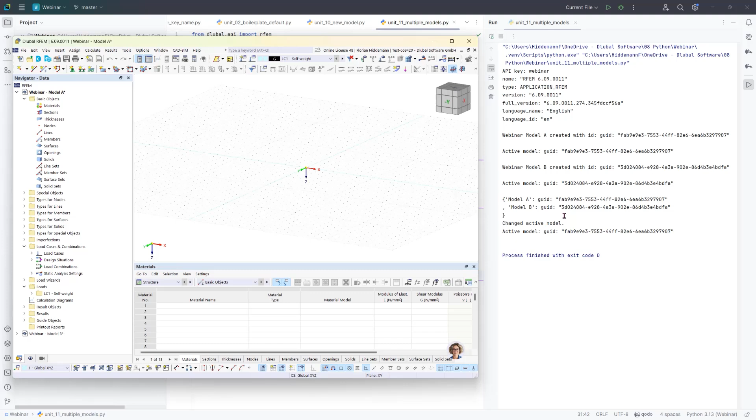And on the right side you see it - here's the first GUID of model A, this is the active one. The second one, model B, is created with this ID, and RFEM switches the active model to this one. This is stored in our dictionary, and I can change back to model A with just a simple call.

If you are in an active model, every other API call uses this model for manipulation. So you can have one connection working with several models, switching back and forth and getting information at runtime about which model you are actually in and where you want to go.

Another important use case to work with models is if you already have existing models as an RFEM file. In this example, I will open a model from an existing RFEM file. This is stored and set up here as an absolute path, in a raw string. We make our connection and say, open the model from this path.

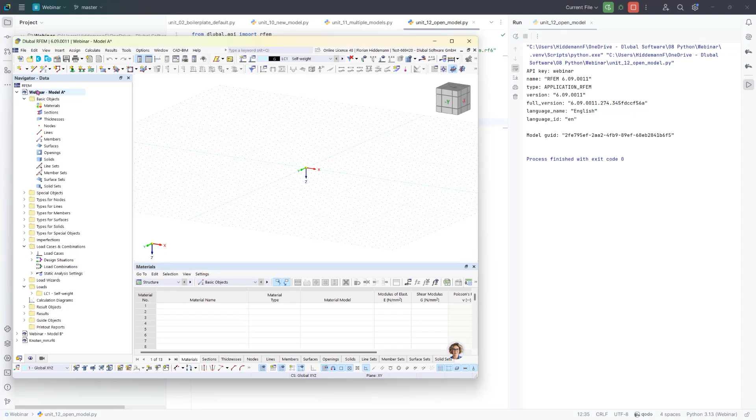What we can show just here - I prepared a simple example model. So we can see it opened and get his model ID back.

This model here is the one which is prepared, and I set it up with other units here as a model setting, where you can see it's not a freshly created one. Important to say, we are working with SI units here for all input values and for all output values, which we see later on in the results.

Okay, this is now the installation and getting started part, working with multiple models. Now we change to the principle of operation - how to actually work with RFEM objects. We will look at the mapping of the structure navigator and the API structure, and how to deal with the properties and make new objects and update them and so on.

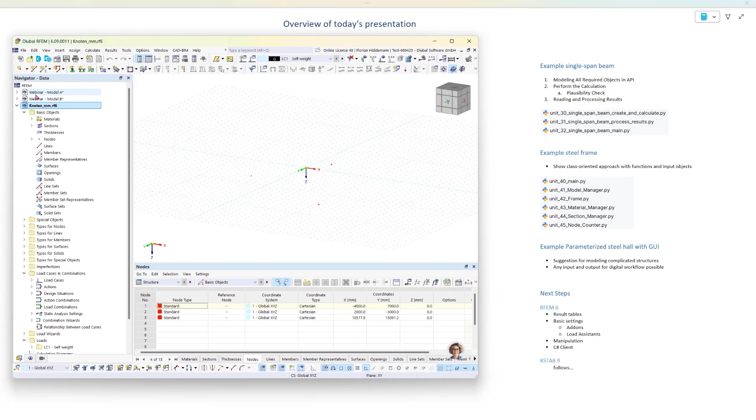If you are familiar with the RFEM structure itself, you will see that our API is trying to get as close as possible to the structure in the navigator. You have here some basic objects - structure core, structure advanced, we call it in the API, types for nodes, types for lines, and so on, nodal supports. Everything you can see here and navigate through, we are trying to replicate as far as possible with the structure of the API itself.

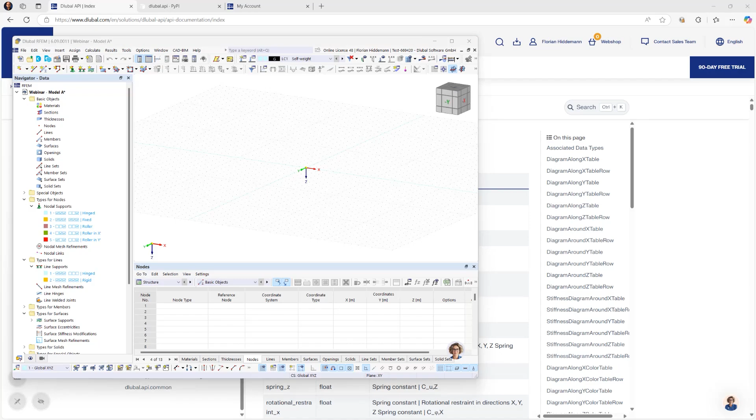So you also have structure core, which is lines, nodes, members. You have the loads, the loadings, and you have types for nodes, nodal support. This is really corresponding to the structure you can see in the main program, just to give you a better insight where to look for some objects. So how is it working now? We start by creating a simple node.

When we made a new model, this is called create node. First, I define my node with the wished properties. In principle, you can say we have two steps every time, or two separate parts.

One is I'm working with model objects from the API. You can see here, this is a node using the structure core from the RFEM package. This object is used to define what I wish as a user to model in RFEM. And this node object is given as a gRPC message to my actual API call.

The API call, we don't have so many API calls like in our first generation. You can see the API call itself, it's very lean. We have calls to calculate, to create things, to delete things, to get things, save things. There are some specialties like a plausibility check, working with the models I showed you. But this is really it.

There are maybe 30 or 40 API calls in the future, and a lot of objects to define and transfer. And all properties, all model objects are defined by these model objects API. So this is important to understand: I define my desired object and send it via this call to RFEM and let RFEM model it.

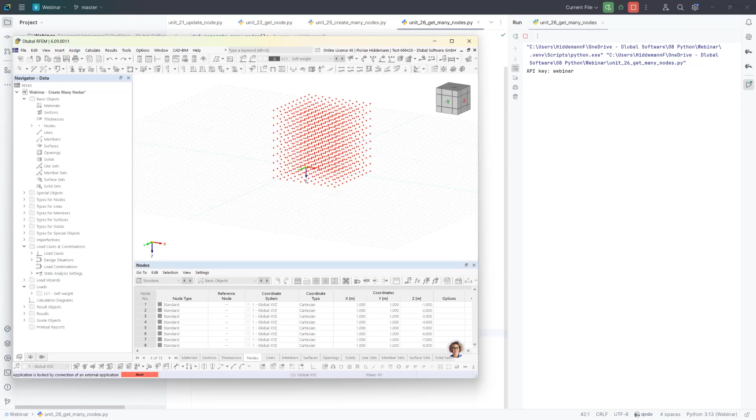Just open RFEM, create these nodes again, and what's happening right now is, we hold here, print and hold, and say, okay, show me this node list you returned. This also is a self-defined class in our package. It's not a dictionary, it's a special object which is representing our object ID list. And this object has all the node IDs and says, okay, this is an object of type node.

So this is a way to get back which ID is defined via this call for many nodes. It answers with, okay, I created 1,000 nodes, and here's what I created. And the last one has number 1,000, and it was a node. Right. So if I want to manipulate these nodes later on, first I need to create an own list where I store dummy objects which contain these node numbers. And to make an iterable object from this returned node list, I have to add object ID after it. Now I can iterate over it in Python.

And we will make a new real list, which is called dummy nodes. And for each item in this object ID list here, which is iterable, I will append a new object. It's a new node containing exactly this number we see from this output. So after that, we have a list with dummy nodes. And let's have a look at this.

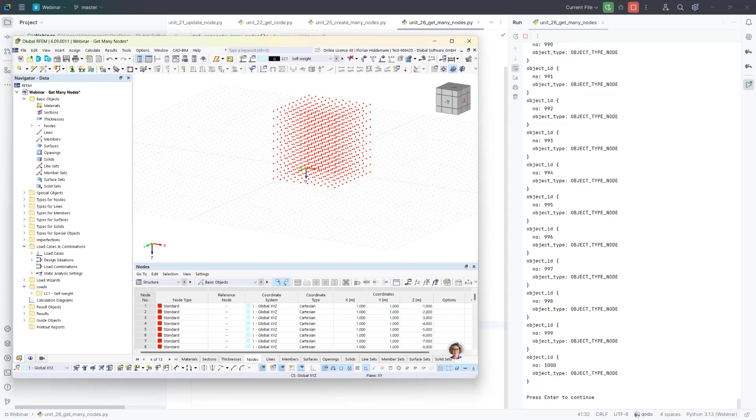Oh, isn't it working? Yes, no. Okay, now it's doing the second and third one.

So we printed the list with dummy nodes, and if you print a node and the only information it has is its number, it prints its number. So we have stupid nodes which have their number, and with this list I can work later on to manipulate them. But this is the first example, a workaround how to get numberings from a node definition at the moment. We are working on improvements about it.

So if you have now the IDs, then you can ask RFEM, okay, give me the objects for nodes with this ID. And this is the last step here we just saw. This is corresponding to what you see if you get a single node information. We are doing the same like here with an object list, with a list of node IDs. And we can see these are the informations for each node we have created with the many nodes function.

So now we can also update a lot of objects at the same time. Like last time, it's an extension of the shown example. We have the returned object list, and I just made a helper function which is handling these object IDs and making the dummy list for me. It's returning the dummy objects. I show you in the last step here as an own block, and they are stored here.

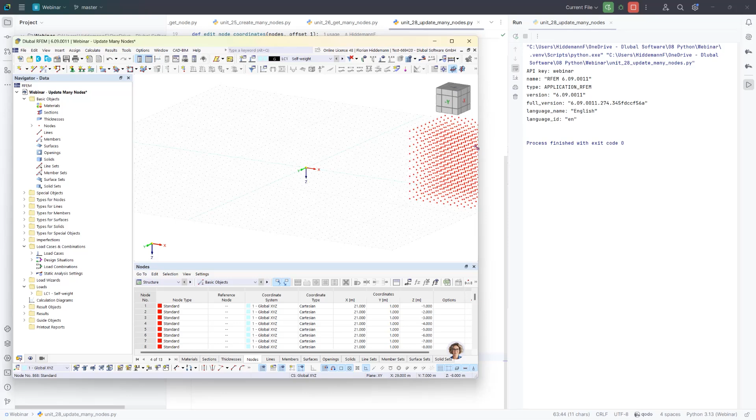So now let's finally dive into the small real-life example of a single span beam. We will use the principles we got to know in the first 2 chapters, playing around with nodes, and now go for other objects as well to model a single span beam. If you look closer here, we are doing exactly the same like with the nodes. We will slightly restructure it to make this work within our own create and calculate function. The single span example is split into create and calculate, processing of results, and a main script which is calling both of them by importing these unit examples.

Let's have a look into create and calculate. We will again define all model objects with one creational call, create object list, you know that in the meantime. And the specialty is that we are defining all model objects in one list, not only the nodes. So you can see here we have the same small import with Dlubal API RFEM, and we have the nodes, the line, material, section, and member. Everything in this structure you are already familiar with.

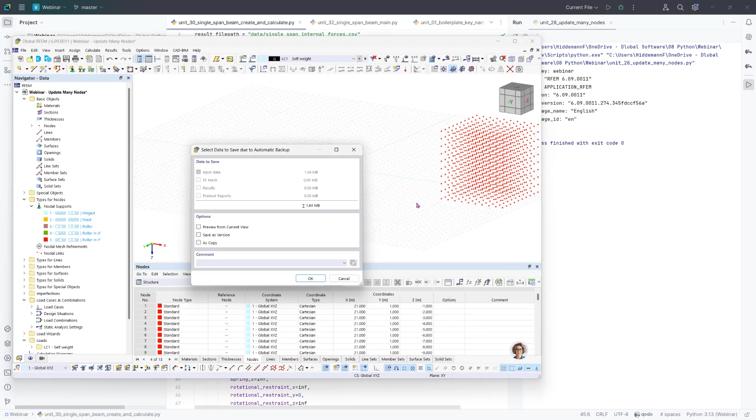If you want to define material and section, maybe you know it from applications in the past, just go into these RFEM settings, for example, and try out what's happening if you look for a special string. What's happening here in the background is if you put a string as a name for a material or a cross-section, RFEM is looking up the first option it finds and uses it later in the program, so you can check it on the fly, what is what.

So in this way, we also define the loadings, design situation, static analysis setting, load case, member loads. Remember, it's defined in SI units. And why is it important to define everything from scratch? With this call here, I delete all existing objects in the RFEM model. And you know it by default, if we create a new model, here are some objects and load cases which come as default. And with the delete all objects call, every one of these objects is deleted. So you have to make everything from scratch.

And as well as here, in the examples on our website, you can see different types, not only the nodes I showed before. So you can have a look later on, or every one of these unit lessons here will be provided after the webinar for you. So once you defined the object and created it, we will perform something new. We will make a plausibility check.

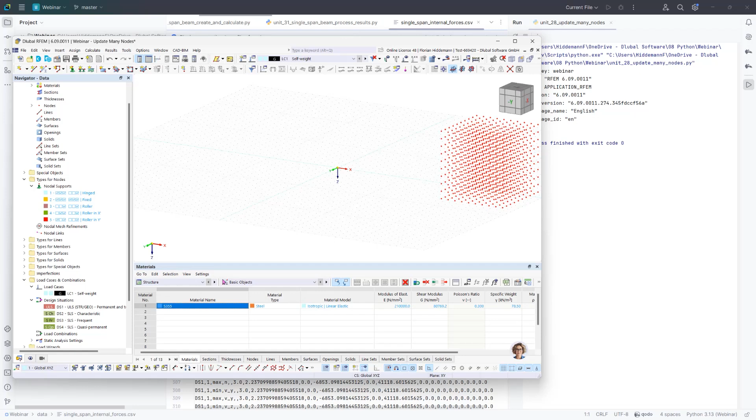And the result format you will get is more or less directly oriented. This is the CSV we will get. It represents the table you can also view in RFEM. So the whole structure of getting results is based on the structure we get in the results table too.

But let's see what happens in the program if we start it. So what happens here in the background, you can see it on the right side as well. The plausibility check was successful, true, so the calculation just started. You can see it here, bottom left.

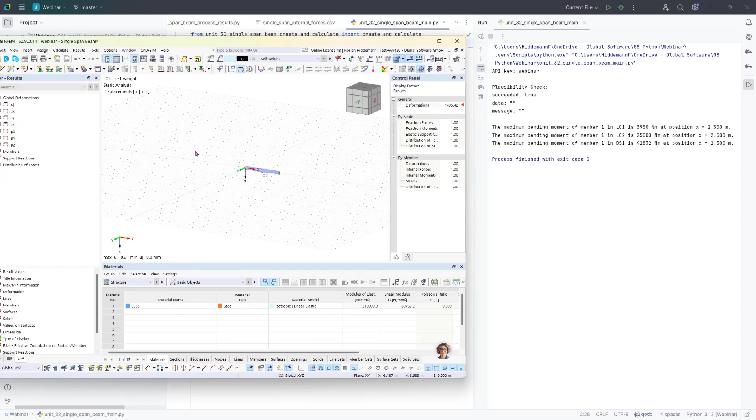And now it is getting the results, processing them, and is printing out what we defined here in our little process script, just to give you an idea how this is working. And let's check what we found out. If I go to the server here and activate the results, we looked for the maximum bending moment about the y-axis.

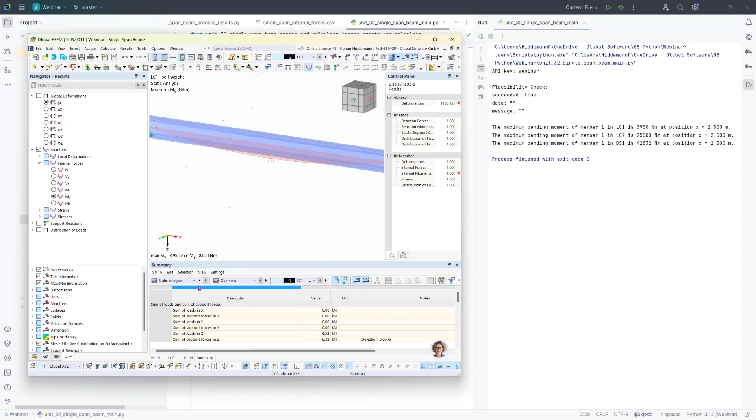So it's 3.95 here in SI units, Newton meters, at the position X, 2.5 meters. The whole beam here is 5 meters, so this is plausible. And you can see if we have the results table for static analysis.

And go, for example, in the results by member, this type of presenting the results and the internal forces here corresponds with the logic the CSV file is built up in the background. So if you get the results, it's more or less oriented to the logic you see in the result tables. Again, we try to make it as comparable as possible to the RFEM structure, like with the navigator for input objects.

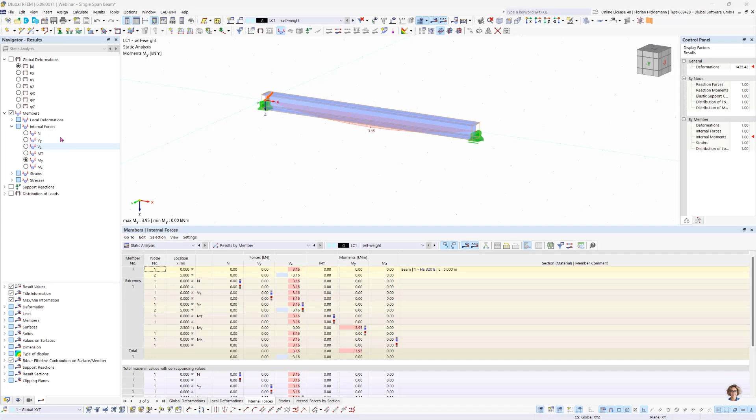So what do we have as a maximum? 42.83, and we found the same value in the CSV files. So that worked quite well. And now you got an idea how to work with a full case of a small model.

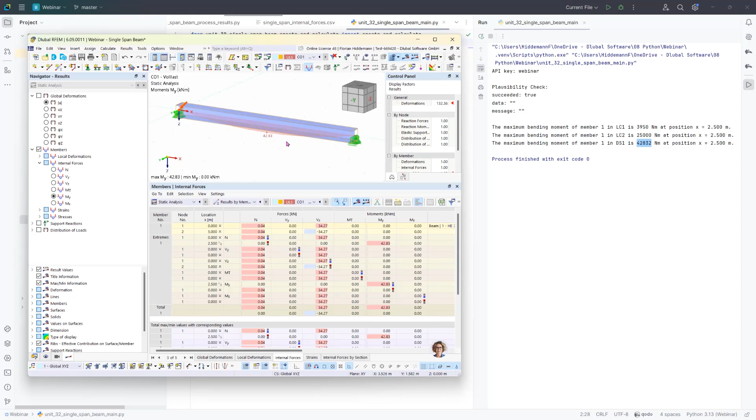Calculate all is one of the API requests which costs Dlubal credits. If you perform this action, you will see a new API request in your extranet and see we used 1 credit for 1 solver run. So have this in mind when you need to check which call was requested for some credits.

So in the final minutes, I will switch to another 2 examples. Just a quick glance on the steel frame here, which showcases how this could look in a more class-oriented implementation. Because what's important to say, you don't necessarily have to work with the with statement and RFEM application. Of course, it is also possible to write your own class, for example, and open the connection within this call.

But then you have to handle closing the connection as well, to ensure that RFEM opens and closes. In the with statement, it is managed by Python automatically, because the implementation of our application method is handling this together with the with statement. But if there is a need to define your own classes for testing or for productive use, feel free.

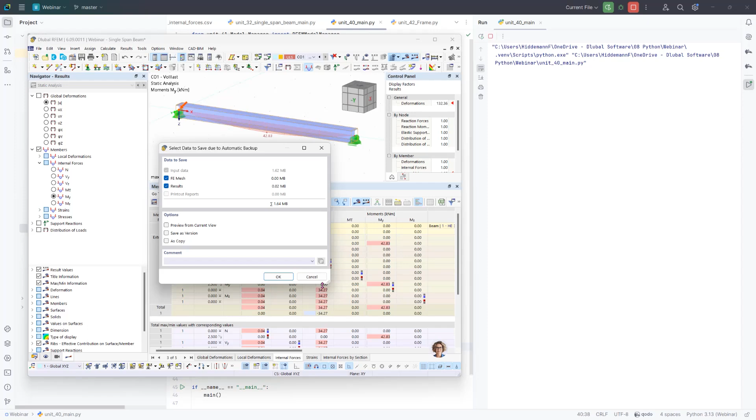And you can use, for example, your own model manager, which is opening and closing connections with your own set of code. It's quite another style here. You can also make your own classes for frames and so on, for calculation of nodes, for members. Just to say it's not necessary to work with the with statement. So let's see how this is going. Of course, the connection then opens and closes as well.

And here in this example, I used a class for a frame to model two different frames, which build on my own class I wrote, with separate properties. And you can be very creative, defining your own classes, your own model definitions, put some complicated logic inside. And what's really nice about it, here in the frames, there is no single API call included. Everything will be handled in the model manager by transferring an object list to actually build these objects.

And in this example, because I don't like to repeat myself every time making plausibility checks, I just built in a method which automatically performs a plausibility check. So you can automate your workflow like you wish, so that it tries to calculate, and if the plausibility check is not successful because the model was not supported, we see it here, we just built the frames but with no support, then it doesn't calculate, everything is handled well, and the connection is closed. So just to get an idea what is possible with that.

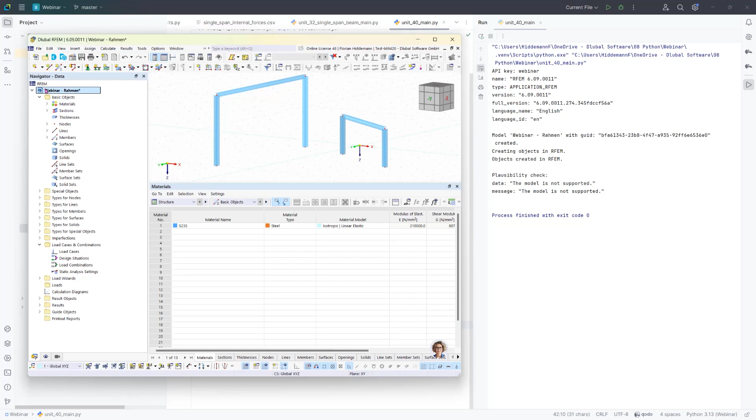And finally, we will have a look at the steel frame, which my colleague Robert Milrat provided me, thanks to him. So let's close this model and switch to this project. We prepared this in a way that we will see our own graphical user interface. So let's see. Here we see this graphical user interface, and I will open RFEM in the background.

So just to give an idea, you can do whatever you want with input values. You can do whatever you want with the results you get from our API. So just as an interpretation of what is possible, you can program yourself a UI, web application workflow, a database workflow, whatever you need.

And if we create this parameterized steel hall here in the background, you will see there is a time-consuming process opening a project file. This is what you can see here. This is at the moment what is taking some time. Once the model is opened and the data is loaded, it will be very fast to model all these entities we defined in the program.

So you will see the performance speed advantage also on this model, but don't get confused about reading data here. This is not the API call which is taking time right now. Maybe we will have a look into this further, how we can improve the preparation of this model. But preparing, reading the data takes some time.

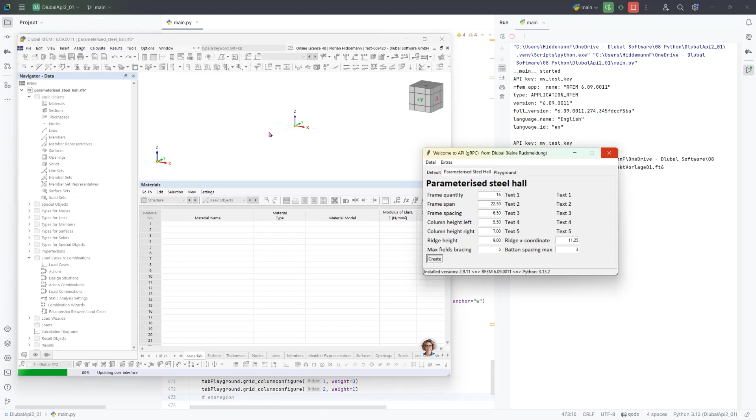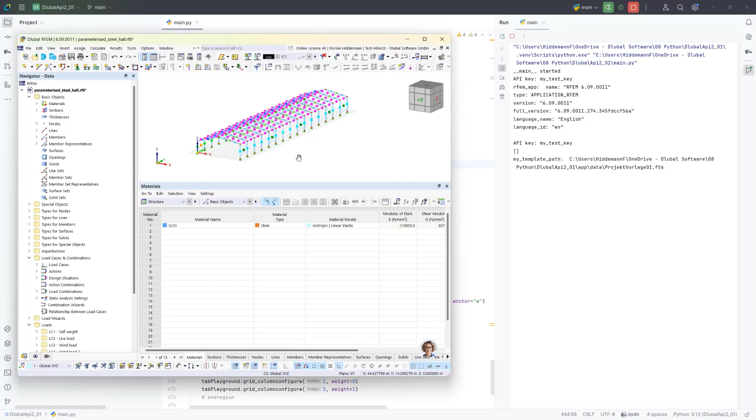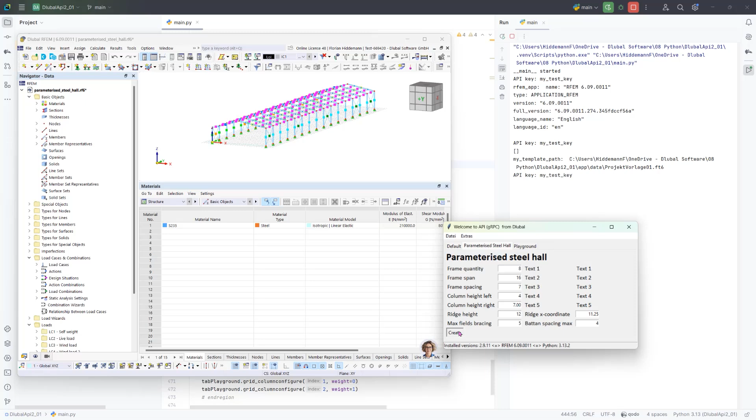And just to get an idea about a second run with different parameters, you can obviously choose your own values here, make different settings, just to play around a little bit with it and get an interesting geometry. This can also be fully automated in the background with a headless server version. So feel free to use your fantasy and creativity to create your own workflows. I let this load in the background again. We jump into the results later on.

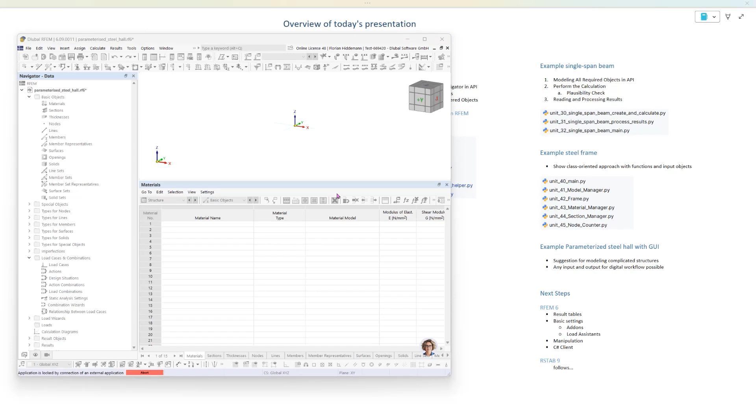It would be very nice to go with it now in the next step and to set up some add-ons and load assistants. This is one of the next steps we are implementing for the API. We are trying to enhance the result tables to get every important option for the results in the program. So now you can see it popped up here, the model opened and it modeled. This is the speed of the API, which is much faster than the loading process of the template here. So yeah, you can see it worked.

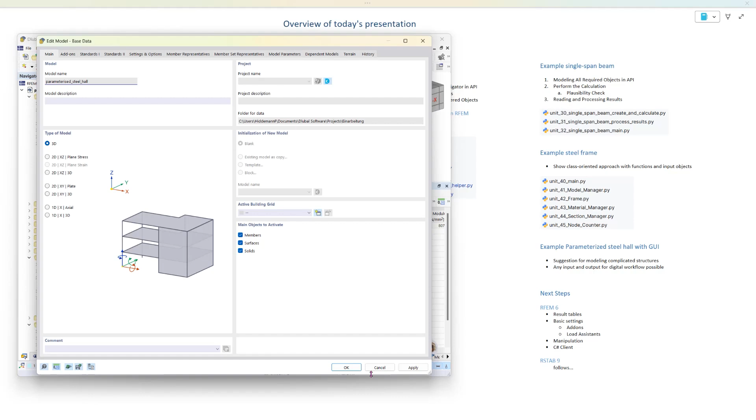And what needs to be implemented in the next step is really manipulating these base settings with the API, so that you can activate different add-ons. In fact, every register here, except for the terrain. Terrain is a model object. To steer this and use add-ons and also use the load wizards in combination with the normative standards. So this is one of the next steps.

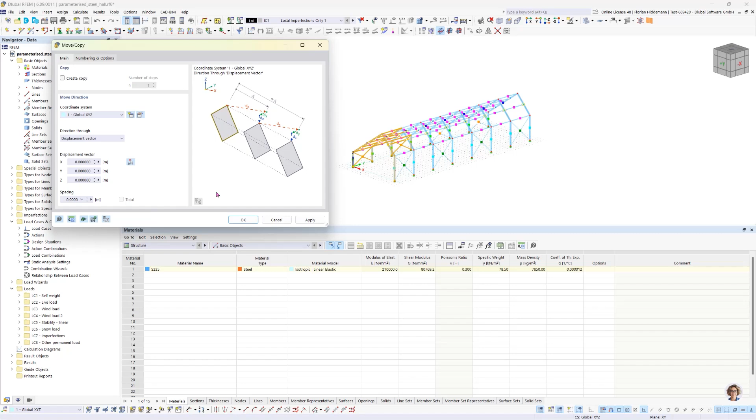And also for the Python API, we will allow the manipulation of some objects which are used in the manual operation with the graphical user interface. So there will be a special version in the Python API to use these manipulation functions also via code. So it's more or less interactive then, and you can react to the model and use the copy feature to create those frames or other things. And this is currently in development.

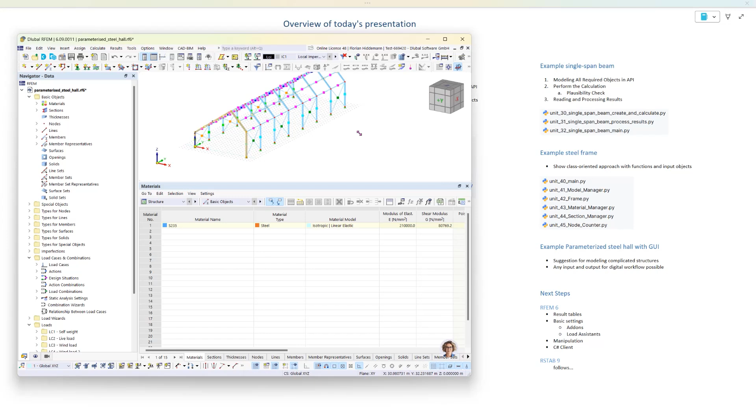And also good news for those of you who used the C# client in the past. Since we are using gRPC and protobuf, it is technically possible to build your own C# client. And we will do this in a basic version for you. Currently we are thinking about how to provide it, where to give you the package. In the future, we will try to give this as a second option to the Python solution we already offer. And after we did those basic steps for RFEM 6, of course, RSTAB 9 follows as a second big application where we will implement the API. So stay tuned. Have fun with this.